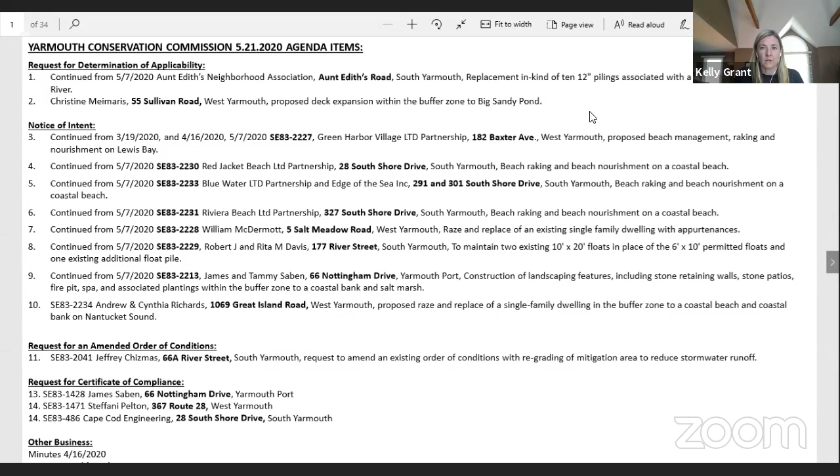Okay, so we are recording, so we will go with that, and then we can upload the video afterwards. Okay, so let me just check panelists. We've got everyone. Okay, so if we're all ready to get started, I'll start with the moderator script.

The May 21st, 2020 meeting of the Yarmouth Conservation Commission is about to be convened. As a precautionary measure to reduce the spread of coronavirus, all town buildings are closed to the public. Therefore, this meeting will be held by remote participation. My name is Kelly Grant, and I will be moderating participation for this meeting. I will now turn it over to the chair of the meeting.

My name is Ed Hoopes. I'm the chairman of the Yarmouth Conservation Commission. I will begin by taking a roll call for quorum.

David Bernstein. Here. Rick Bishop. Present. Tom Durkin. Here. Ed Hoopes is here. Paul Huggins. Here. Ellie Lawrence. Here. And Patricia Mulhern. Here.

With a quorum present, I will now call the meeting to order. I will now ask the moderator to explain how remote participation works. Okay, so pursuant to Governor Baker's March 12, 2020 order suspending certain provisions of the open meeting law...

All right, thank you. Our next order of business is a notice of intent. It's been continued from March 19th 2020, April 16th 2020, May 7th 2020. It's for SE 83-2227, Green Harbor Village LTD Partnership, 182 Baxter Avenue, West Yarmouth, proposed beach management, raking, and nourishment on Lewis Bay.

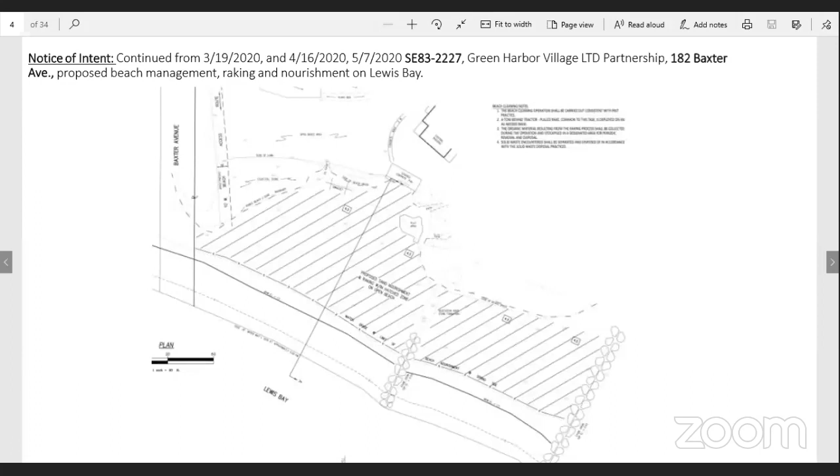Bob Perry, I think I saw you out there in the audience. Bob, you have to unmute. I'm unmuted. There you go. I'm on a speaker, will it be clear enough for you? Right now you're kind of just a little shaky. I'll let you know, if you see me waving my hand you'll know we can't hear you, okay? Bob? Is it better now? Yeah, that sounds a little better. Okay, I'm going to try again. How are we doing? Yep, good. Okay, let's hope for the best.

Just to be brief, we submitted some revised materials. For the record, Bob Perry, Cape Cod Engineering. I believe a representative of the Davenport companies is with us tonight, Jamie Vieira may be on the line. I am representing the Green Harbor Resort, and we filed a notice of intent for beach nourishment and beach maintenance in the form of raking and cleaning up. This work had been going on since decades ago. They had an expired order, so this application is to reconstitute that program.

We were before you a month ago. We submitted some revised information relating to a monitoring recommendation, as well as marked out on the site some of the dune boundary that was there. We didn't make a lot of changes because there really weren't that many changes to make. But the upshot is that the activity for nourishment would be followed by a monitoring activity that we outlined in our letter. I reviewed it with Kelly a few days ago, and we didn't have a lot of trouble there.

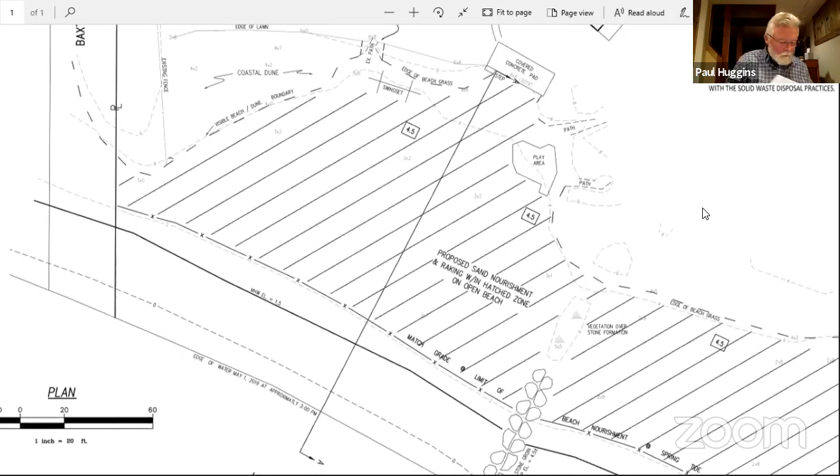Okay, Rick, I see you have your hand up. I just mentioned before the hearing started that I was recusing myself from this and the next two hearings. Okay, thank you, Rick. So let the record reflect that Rick Bishop has recused himself from this hearing.

Jamie Vieira from Davenport would like to speak. All right, hold on. So, commissioners, do you have any other questions right now? All right, so then we'll go back.

I do have one question on the access to this for the machinery. Does the plan show where the path is? I know it said it's going to change the path, but yes, we did. We changed that for you. It's now at a location where there was a pathway opening. It is now drawn to be 10 feet wide.

Ah, okay, yeah, right there in the center. It's just a sand pathway at this point. We don't think it would need any structural improvements, possibly a small border of landscape timber. But if we wanted to find ourselves with a more stable ramp, we would come back and talk with you about it, or bring it in and show Kelly.

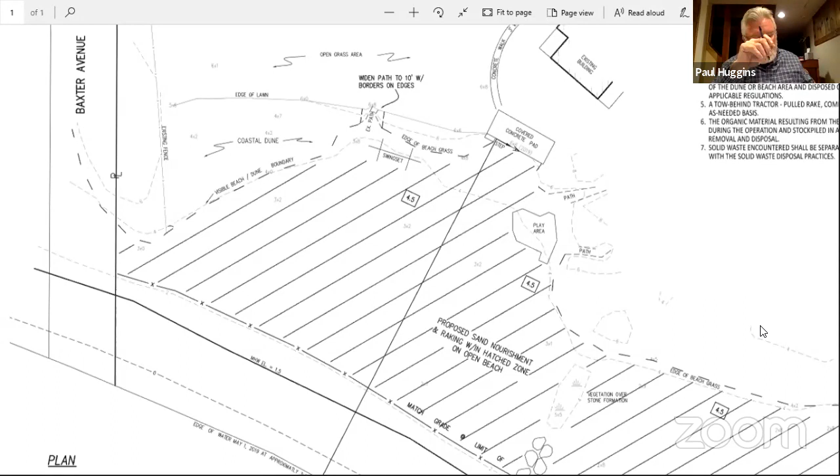Okay, so I don't see where you're talking about though, Bob. Are you talking about where it says widen path to 10 feet? Yes, that's amidst the little playground collection there. That's where we've got an opening already. I thought that was further over, wasn't it? Oh, that swing set. Okay, I see what you're talking about.

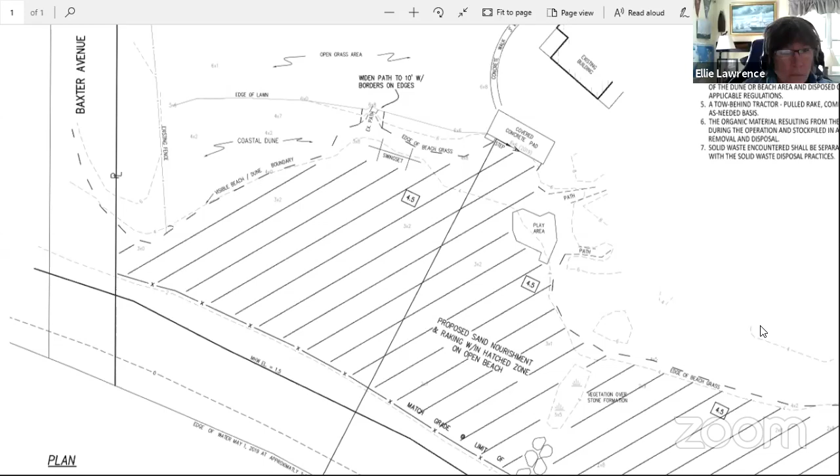Yeah, I'm going to let other commissioners... This is Pat Mulhern. Okay, Pat, go ahead. It's noted that there was no volume on the material specified for the nourishment, and that should be put on the plan.

Bob, I would have to double check. I thought we had put that in there. And there isn't a specific volume in the sense that, and I thought I calculated that at one point, and I'm so sorry that it may not be front and center.

I'm just going to clarify, it's Kelly here. 500 cubic yards is called out in the notice. It's just not called out on the plan. Right, we calculated that based on the profile.

If you've been there, you know how flat and uniform the beach is. That volume results from a calculation of that very thin triangle. I think it would probably be a maximum, but the nourishment monitoring goes a little bit into the general practice and the need for this. We have a very flat beach, and the need for nourishment is primarily driven by the prospect that the beach could become so low that moon tides would inundate it. And that's why the profile you've seen is a very slight change.

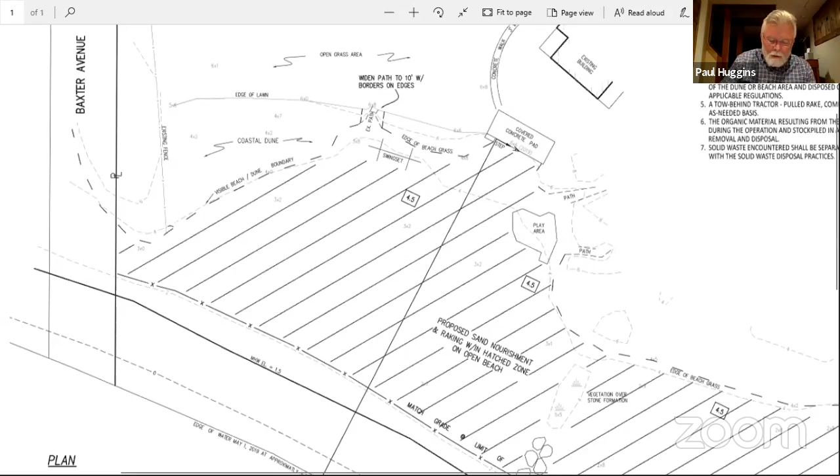And then there's a note that says the new plan includes a note that beach cleaning shall be carried out consistent with past practice, and there's a recommendation, I guess it is, that this should be removed, and the raking condition should be something else. There's a note to that effect. Is that to be discussed too?

Yeah, so my comment related to that is just that it's a very generic statement, and I think it would be helpful for it to be clarified with some specific points. So those have been included as a draft motion as well for conditions related to beach raking. Speaking with Bob previously, we'd include those conditions on the plan so that it's very clear for everyone involved what those conditions are. So those can be included in the motion as well, and we can review those in advance of the motion if you would like to.

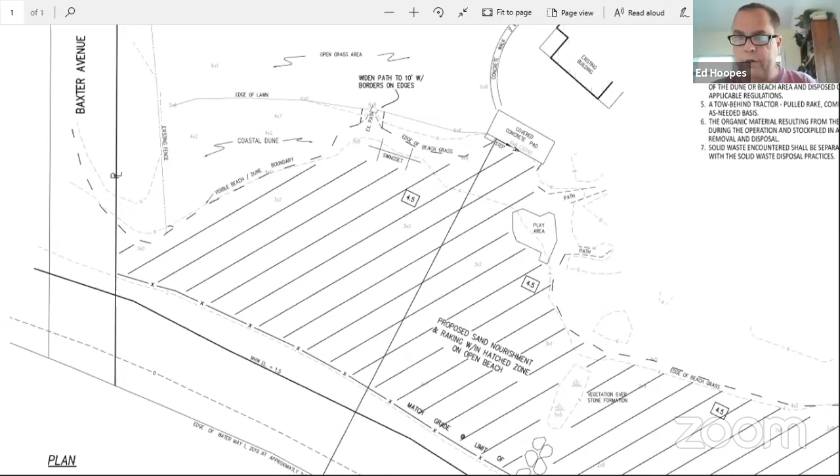Okay, I just wanted to make sure they weren't overlooked. Okay, thank you. All right, commissioners, any further discussion among the commission? All right, Kelly, any other comments? I have a general comment that I think will relate to all of these four projects, and that is...

There's evidence of some recent work on the beach on South Shore Drive, and I didn't get back out to Baxter Ave, so I don't know if the same work has occurred there. But that's obviously work that's been carried out before we've issued any permitting, which is concerning. There are also signs that the beach is being excavated, where sediment is being moved around with excavation equipment. I just wanted to clarify that that's not what is being approved by these permit applications - these applications are for nourishment and raking of debris only, not for removing sediment around on the beach.

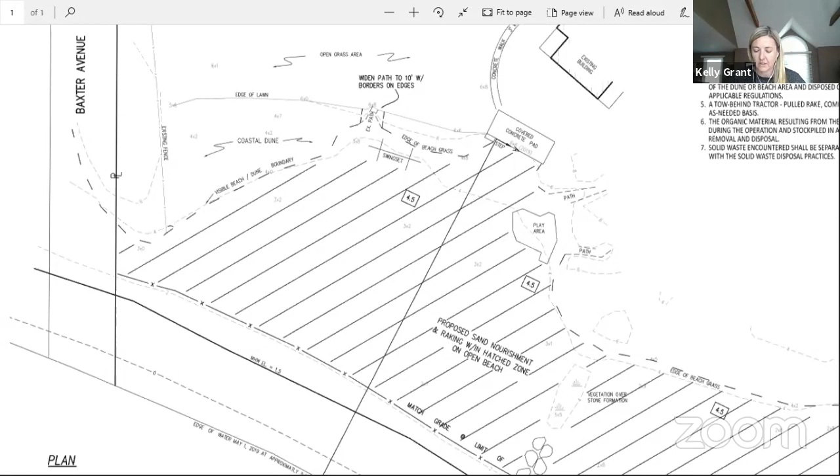So I wanted to make sure the commission were aware of that, and that the applicant was clear on what the expectation was in terms of the work that would be carried out in the future. It's a little concerning that work is being carried out now prior to the permits being issued. All right, so Bob, do you want to handle that, or does Jamie in the audience want to comment on that?

Bob Perry here. I haven't been aware of any activity because, of course, we're not there. I think Jamie Vieira, if he's here, can speak to it, or I will certainly convey what we've just discussed to them.

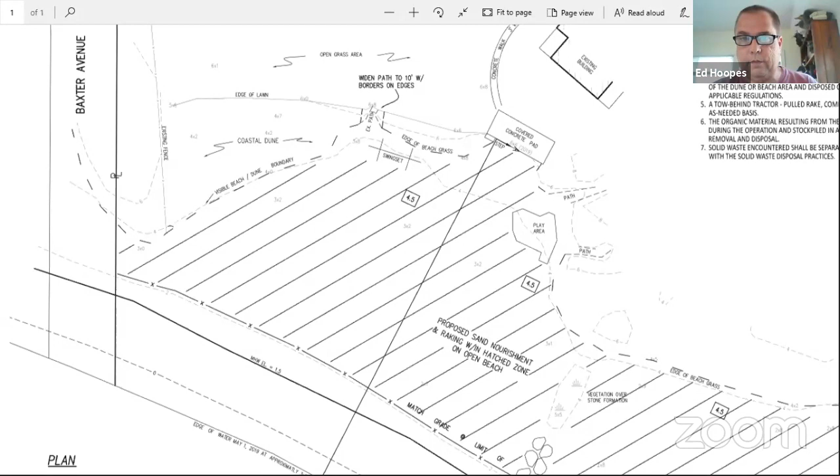Okay. Jamie, go ahead, make sure you unmute yourself. Okay, this is Jamie Vieira from Davenport.

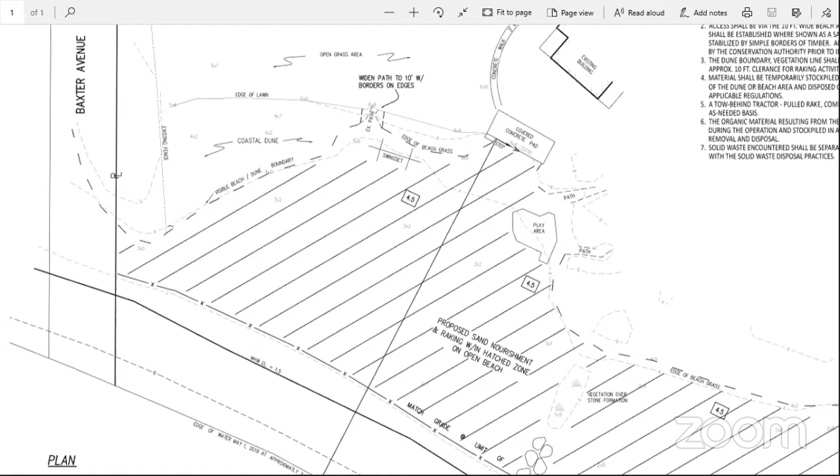I'm not aware of the full extent of what Kelly was referencing there, but I'm fully aware of what the scope of our approval would entail in terms of raking. I haven't seen the conditions, so obviously we'd like to hear them so we know what the parameters are.

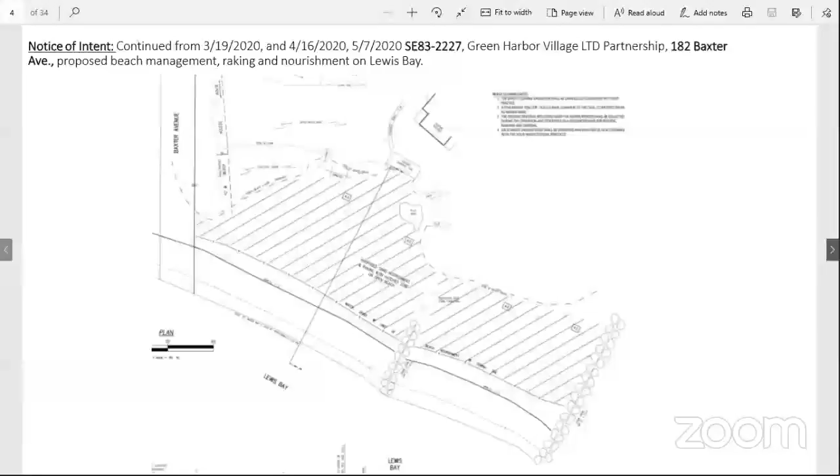One point I wanted to reference, and that is on the plan. You'll recall when we originally submitted, we asked for 10-foot access along the west side. We heard the commission loud and clear the last time, and we removed that. The point of access is presently now in the center, shown on the plan. It's about 6 feet wide, and we're looking to make it 10 feet wide.

We would remove the existing ramp that's there, and we would like the ability to bring in some sand to bring those elevations and make that grade sand versus a ramp. So there would be some addition of sand in that area so we can create that pitch for purposes of having a smaller piece of machinery than we envisioned going out on the beach, but we still need 10 feet.

For some of the commissioners' understanding, that piece of equipment goes out maybe once a week. Other times there's some daily cleanup, and that's by hand. Individuals may go out after the day's events with a small hand rake and clean up some areas, make sure anybody who left any trash picks it up, etc. The actual raking per se with machinery is now going to enter through that central area. We'd like it to be 10 feet wide, and we'd like to utilize sand versus that board ramp.

Okay, so what about the excavation that's been worked on already? I've got to find out what it is. It's not my department, Ed, apologize for that. There's a lot of things that are going on with the resorts as we wait to open, so I'm not 100% sure what that entails.

But as I said before, I know certainly what it is that we can do here under the parameters of this NOI or ultimately order of conditions. As it comes to maintenance, that would be the raking. As it comes to nourishment, we've got those parameters spelled out as well for purposes of what would be required for profiles, inspections, etc.

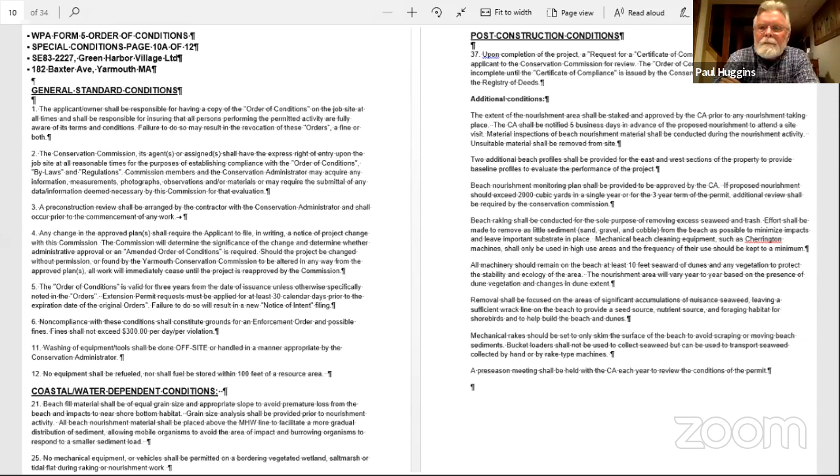Any other discussion? Is there anybody else in the audience who has any comments on this? This is your last chance for comment. I don't see any hands raised. All right, would there be any further discussion among the commission? If not, may I have somebody craft a motion?

Come on, folks, you just got to read it. I'll do it, new guy. All right, new guy.

I make a motion to issue an order of conditions approving project SE 83-2227 at 182 Baxter Ave, using the plan updated May 15, 2020, with the following standard conditions: 1 through 6, 11, 12, 21, 25 amended, 37, and the following special conditions.

The extent of the nourishment area shall be staked and approved by the CA. Prior to any nourishment taking place, the CA shall be notified 5 business days in advance of the proposed nourishment to attend a site visit. Material inspections of beach nourishment material shall be conducted during the nourishment activity. Unsuitable material shall be removed from the site. 2 additional beach profiles should be provided for the east and west sections of the property to provide baseline profiles to evaluate the performance of the project.

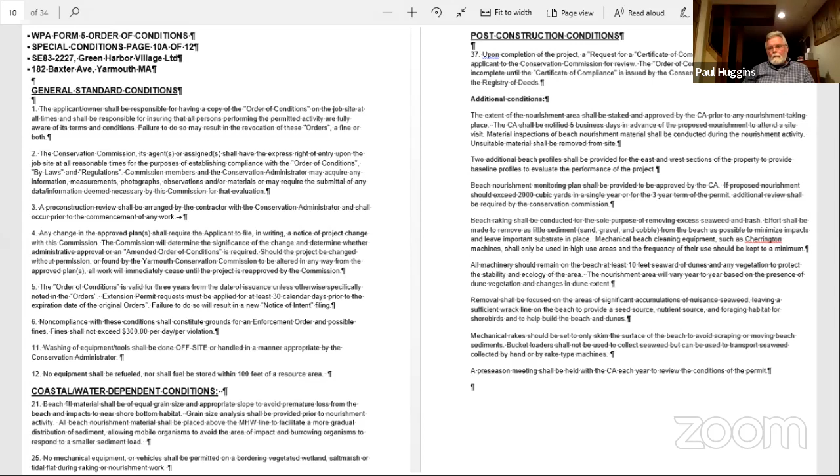Beach nourishment monitoring shall be carried out per Mr. Perry's May 11th document. If proposed nourishment should exceed 2000 cubic yards in a single year, or for the 3-year term of the permit, additional review shall be required by the Conservation Commission. Beach raking shall be conducted for the sole purpose of removing excess seaweed and trash. Effort shall be made to remove as little sediment, sand, gravel, and cobble from the beach as possible to minimize impacts and leave important substrate in place. Mechanical beach cleaning equipment such as a Cherrington machine shall only be used in high use areas, and the frequency of the use shall be kept to a minimum.

I think I got it all right. Or does that go on? It goes on, I'm sorry.

All machinery should remain on the beach at least 10 feet seaward of dunes and vegetation to protect the stability and ecology of the area. The nourishment area will vary year to year based on the presence of dune vegetation and changes in dune extent. Removal shall be focused on areas of significant accumulations of nuisance seaweed, leaving a sufficient wrack line on the beach to provide a seed source, nutrient source, and foraging habitat for shorebirds and to help build the beach and dunes.

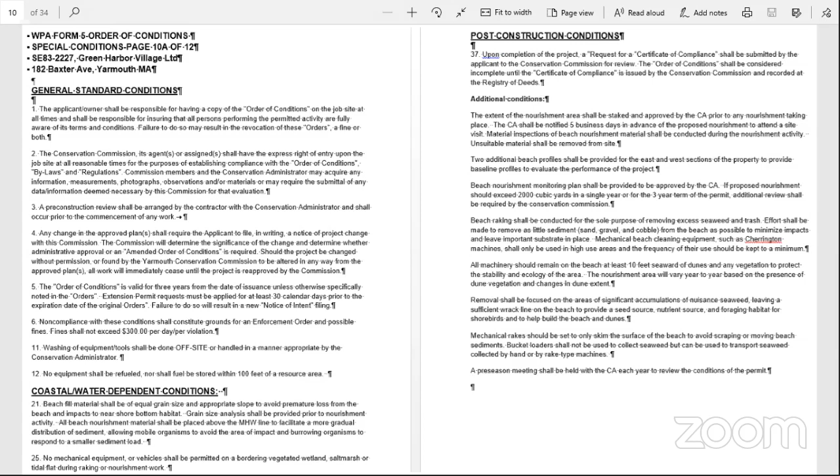Mechanical rakes shall be set to only skim the surface of the beach to avoid scraping or moving beach sediments. Bucket loaders shall not be used to collect seaweed, but can be used to transport seaweed collected by hand or by rake type machines. A pre-season meeting shall be held with the CA each year to review the conditions of the permit.

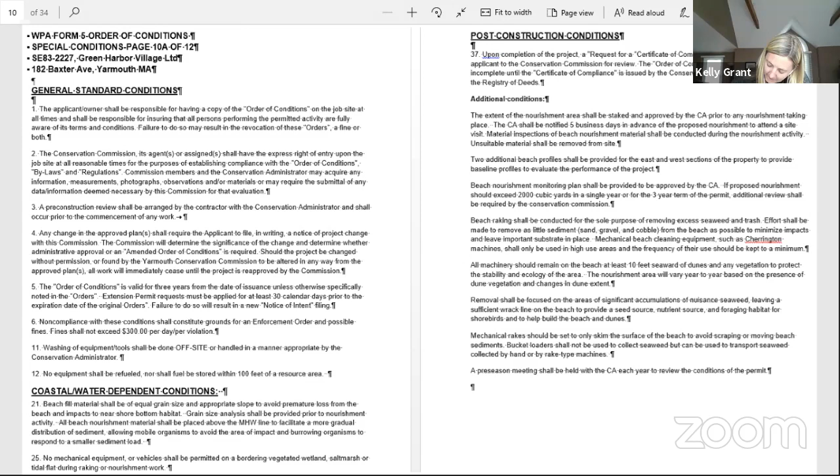All right, very good. Passed. It's been moved. Is there a second? Second, Pat Mulhern seconded. Kelly, would you call the roll, please? Sure. So Bishop recused. Durkin, aye with personal reservations. Bernstein, aye, with the hope that they don't do anything they're not supposed to do. Lawrence, aye with the same feelings as above. Hoopes, aye. Huggins, with reservations, aye. Mulhern, aye. So the motion carries 6-0 and 1 recused.

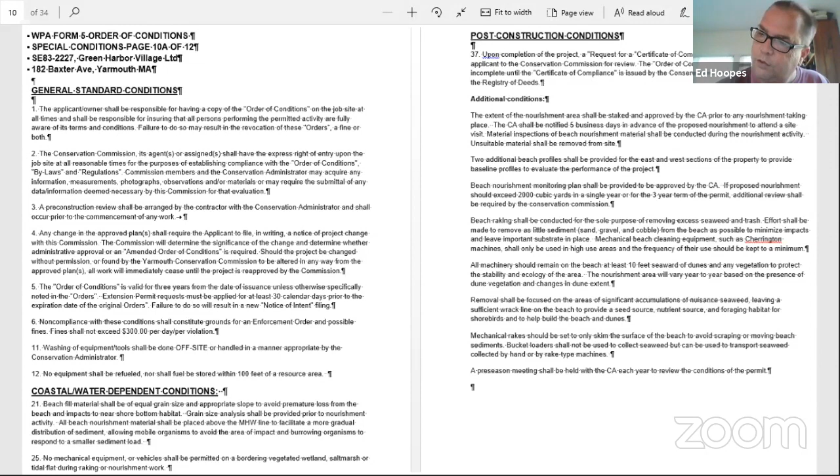Moving on to our next order of business is another notice of intent continued from May 7th, 2020 for SE83-2230, Red Jacket Beach Limited Partnership, 28 South Shore Drive, South Yarmouth, beach raking and beach nourishment on a coastal beach.

Bob, is that you? I'm still with you, and I have similar reservations that you all have, so I'm hopeful everyone will do the right thing. I think it's a lot of management, a lot of people to keep track of, but I think you're aware of it, and I think everybody will do a better job.

We filed this a number of months, weeks ago, I can't recall. However, we've moved it to this date. This again is a similar project to the one you just had. It doesn't have a terrific amount of natural area. The beach at Red Jacket is bounded with the upland by an abrupt seawall. There are some minor dune deposits that you can find that are vegetated, and the same rules, regulations, and practices that you just outlined in the last project would apply across the board here.

The same theories of beach nourishment, of a low beach versus a small beach, apply. Again, I would have to look through my notice to see the exact nourishment volume, but I don't have that at my fingertips. Here, I'm looking at my own notice, I should be able to pull it up. This one had 2,000 -- so this is the 2,000, and it relates to a pretty vast area. It's 99,600 square feet of beach, and it is in pretty good condition these days. But over the last several decades it has been nourished, and I think in the course of obtaining a permit to maintain the beach from a resort perspective, it only makes sense to include some level of nourishment that would be guided by the very same tenets.

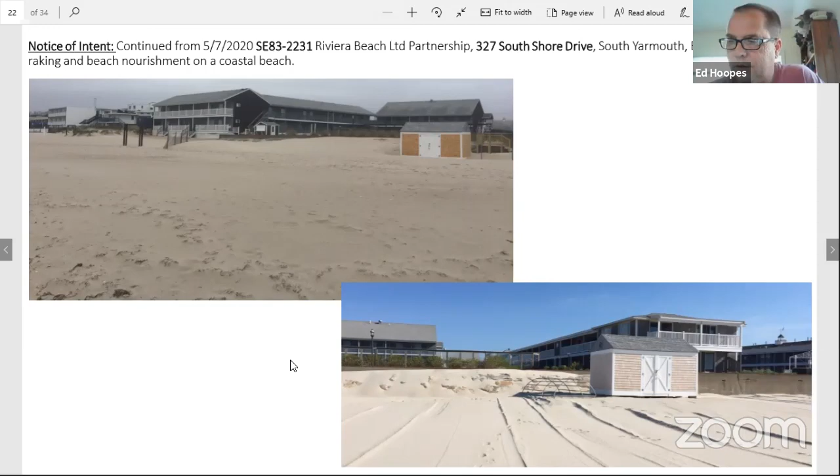Clearly they've been doing stuff over at the Red Jacket. I was there last week and a half ago, and I guess I saw that there clearly had been activity again. And the idea is that we don't have, we no longer have pictures that show before and after photos for the Red Jacket.

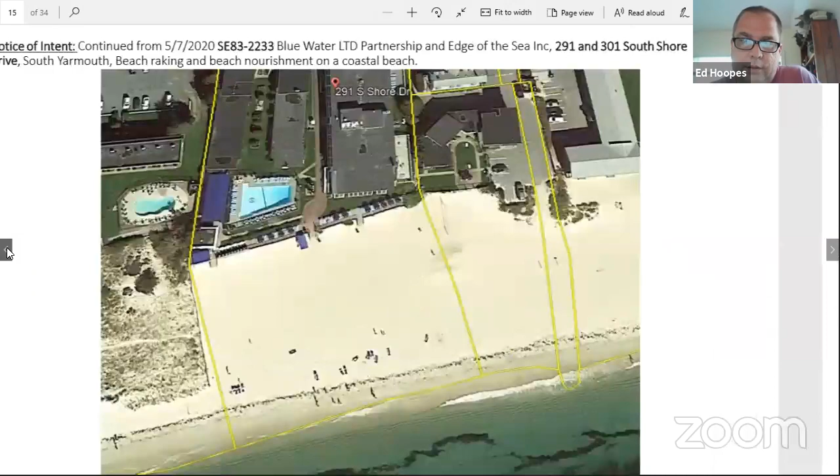Again, I'd like to move that one out of the way, unless there's other comments. Mr. Chairman, Bob Perry here. Yep, Bob, go ahead.

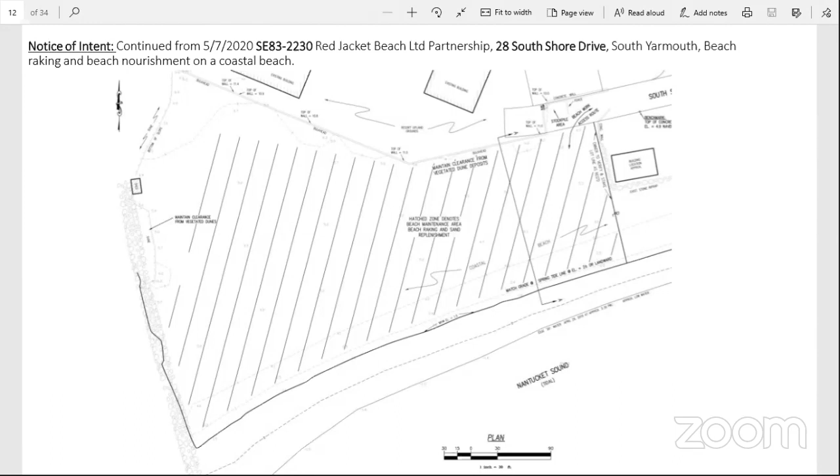I don't need to tell you how hard that makes my job, but I do want to tell you that the Natural Heritage and Endangered Species Program comments are pending. So you're not going to be closing this tonight. And whatever investigations or involvement you need to look into here, I just want you to know that we're certainly going to have to wait for NHESP.

That Kelly, I crossed that bridge the other day. All right, that's an important point. Thank you for reminding me, because plovers were seen trying to nest at 28 South Shore Drive, and with all of that heavy equipment on that beach, obviously there's probably being done some disturbance to that habitat.

I did see that Audubon had put some symbolic fencing up on that property. Right, so yeah, I haven't seen that. Correct, I'm aware that there was a fence installed. They do take note of this area. There are monitoring operations ongoing.

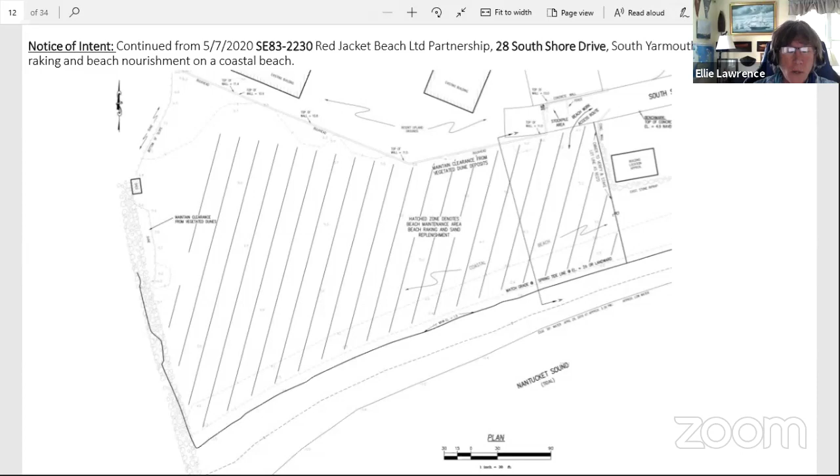Okay, so I think at this point then, does anybody have any comments about the nourishment end of it? Well, this is Ellie Lawrence, out there today, actually a couple of weeks ago. It looked like it had substantial accretion that had occurred over the winter due to the prevalent southwest storms.

We would, I hope, have a limit on how often they can do that, and whether, if the beaches are right, why even bother doing it? I would agree. Ellie, Bob Perry here. The monitoring program sort of points in that direction.

You will find that the management probably wouldn't want to spend the resources if the beach was in good shape. And the nourishment is being prepared for the contingency-level problem. So I don't think there's going to be just a bunch of sand dumped out there for no reason. The management would bring their concerns to our attention. We would look at it. We would bring that to your attention.

And I think that nourishment, it's activity that you would be notified for. And I don't know if you would have a way to put the brakes on it if it wasn't needed, but you could certainly try to build something in like that.

Well, from what the discussion has been going on, the activity has been going on without discussing it with us. So yeah, I have a concern. I for one don't agree with activity going on without authorization. That's not the world I live in, and I don't know that there's any nourishment going on. I think there's, from the looks of it, the ongoing annual get-the-resort-open type activity, which unfortunately appears to have put some sort of a machine on the beach. But that's for you guys to, I think, speak with the organization about.

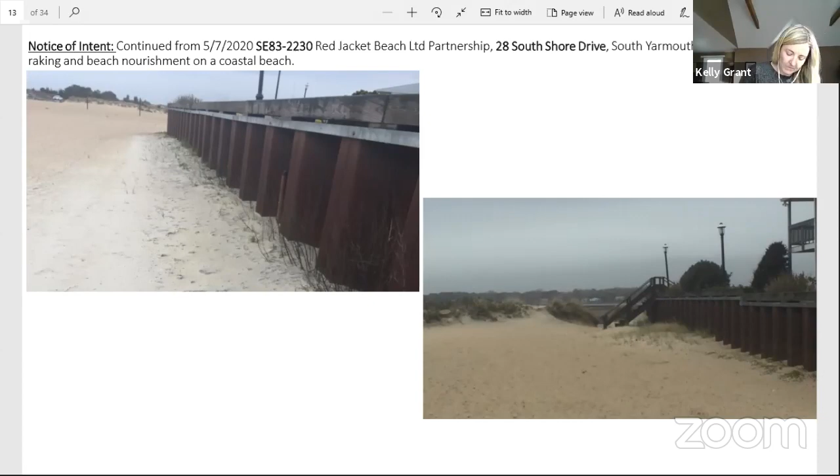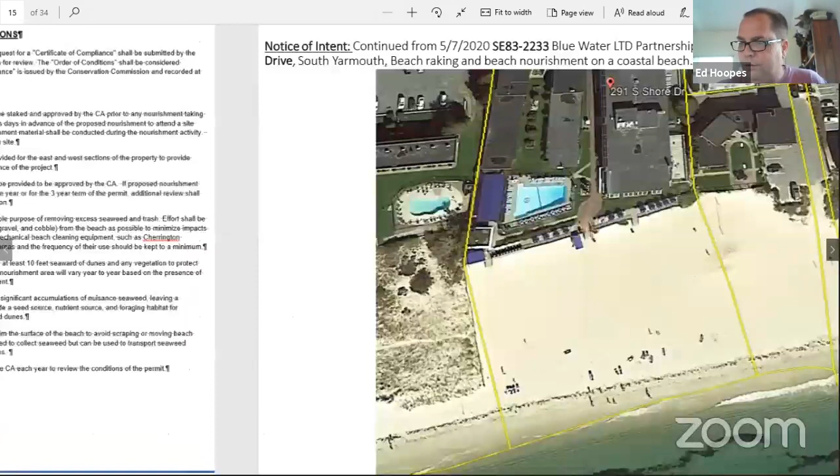Bob, we've heard it all, but if you... Yes, you have, and I won't put you through it again. This project, although similar, did have a dune restoration component to it.

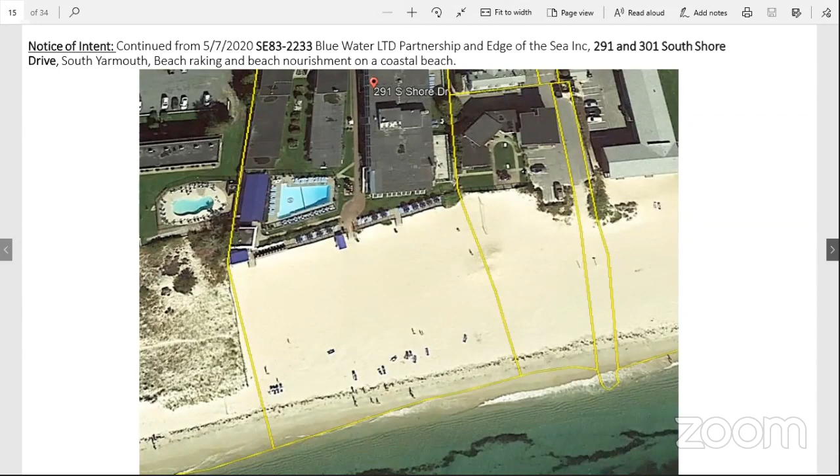We've included that in the notice, but to place the dune deposit where it may be more effective, where it may have a natural tendency to grow, and would provide the same volume of sediment for storm damage prevention and flood control against the bulkhead that's there, and also a source of nourishment for the beach. That hummock of a dune was a combination of natural forces and possibly activity, we don't know, but we've quantified the area and proposed a commensurate equal area to be formed and managed and protected, as you see on this plan.

That's the only difference. I would need to go again and refer to my nourishment volume. I think I'm at 291 here. I've got a bunch of notices open on my computer. Let's see, 321. There we are. This one didn't include cubic yards of nourishment.

It did not, no. Okay, let me just check what we might put. Okay, we put 180 cubic yards in for the dune. And I can see you are correct. We had 31,500 square feet of beach, far less, about a third. So you're probably into the 700 cubic yard range here, maximum.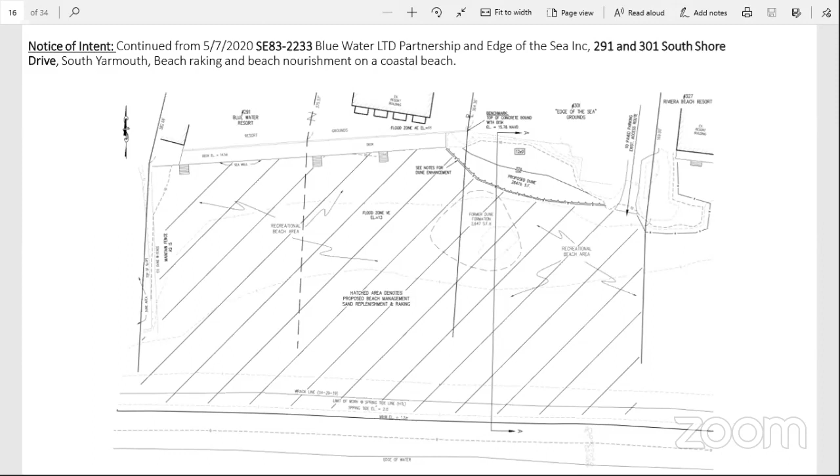All right, thank you. Next order of business is another continued notice of intent from May 7th, 2020 for SE 83-2231, Riviera Beach Limited Partnership, 327 South Shore Drive, South Yarmouth, beach raking and beach nourishment on a coastal beach.

Open it up for your discussion at this point. Thank you. All right, commissioners.

Ellie Lawrence here. Again, I don't think we got the Natural Heritage report on this, so I make a motion that we continue this until the June 4th meeting. Second, Tom. Okay, Kelly, would you call the roll please? So Ellie made the motion and Tom seconded it. Rick recused. Durkin, aye. Bernstein, aye. Lawrence, aye. Hoopes, aye. Huggins, aye. Mulhern, aye. Motion carries 6-0 with one recused.

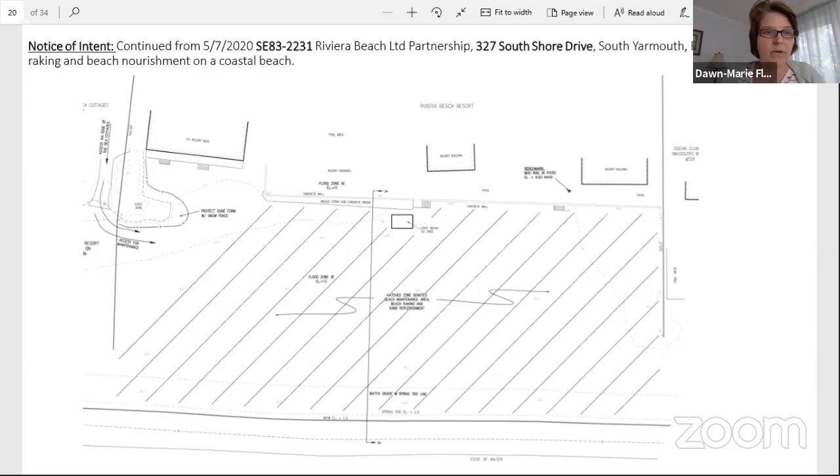We did have another hand raised in the audience. Dawn Marie, do you know? It's... 508-394-1373. I don't know if that was maybe related to one of the previous ones, or should we just unmute them and see? Let's find out who it is. I think it's... Hello, this is Phil Cheney here. I knew it was Phil. There you go, okay.

Right, all right Phil, so we've called your hearing. I think everything has been done according to what we had asked last meeting with the expansion of the mitigation area. Is that right? That is correct. We managed to get it up to a good 2-to-1 overall, including some additional shrubs, and just absorbing all the area with the meadow and native plantings.

All right, commissioners, do you have any questions from the commission? Oh, so it would help if I'm actually looking at the commissioner panelists here. All right, any discussion amongst the commission? Kelly, you good? You good?

Yeah, the only issue I have with this project is that remaining certificate of compliance. I think we have it on the agenda, but we hadn't received the engineer or surveyor's statement in terms of whether the work was completed per the approved plan. So the best I could do in the absence of that, which I understand Dan Ojala is working on currently, is I did a comparison with the current conditions plan and called out, I think there were some things that were being addressed by this plan, such as the downspouts to dry wells. The house footprint looks to be roughly per the approved plan.

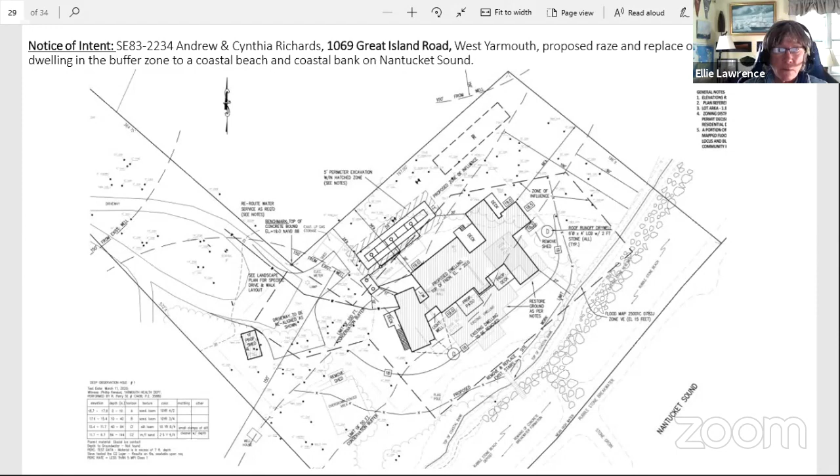Well, I have to admit, I was not out at the site. I don't know who else had an opportunity to go out there. I would be okay with Kelly, if she's good with that, giving her input and her decision on that. Okay, no, I mean, it is pretty thick there along the shore, so.

Can I just clarify, because the vegetation along the top of the bank is fairly sparse, and I just wanted to check what density of plantings was actually being proposed. I think I missed that at the beginning. So you're offering 3-to-1 mitigation—what did that actually translate to in terms of square footage?

200 to 210 square feet. I went over this with Mary just today, in fact, and it would be beach plum. It possibly could be bayberry, but there's a very thick coastal plant community all through here, and there are invasives.

And although it's not on the table tonight, the Richards spoke with me about the possibility that they may seek from you to look into some of that, but it would be off to the sides. But our mitigation, if you look at this plan, would be where the work limit says work limit, right near the coastal bank, just on the water side of that work limit.

That area would be sort of hem-stitching the work limit—we would find a 200 square foot strip that would enhance, probably double the width of the vegetation that's currently on the coastal bank, for a distance of possibly 50 feet or so. That's what we spoke of, because we felt that was where the mitigation would have the best relationship to the encroachment. That's where the thickness of the vegetation to the bank—you can see we've located it here—is the most narrow.

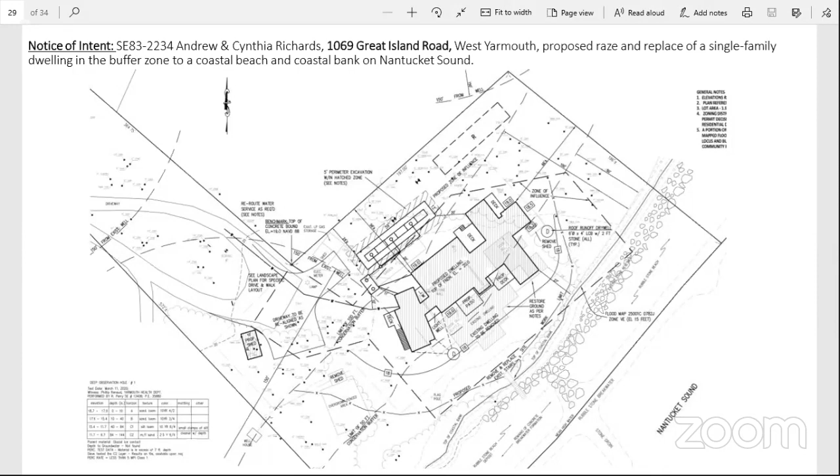I'd say in the buffer, everything is staying that's a tree. There's a 14-inch pine actually that's in the buffer, but it's quite close. I can't say, but that may even be something they'll try to save because it's not to the northeast of the house. But you can see trees that are outside the buffer in that new driveway segment.

There's a few things there that have to go. But when you look at the buffer zone off to where that overgrown fenced area is there on the southwest, there's no proposal to do anything there. The work limit might go through there, but they might clean the area up a little, but there are no trees that I can see of any significance that are in the buffer that I could say would need to be removed. I'm expanding my view here.

I don't want to tell you something that's not quite right. There's a 5-inch oak that I see that I don't see coming out. On the northeast, there's a twin oak. When we get over by the deck, we're about 70 feet back. There's a triple oak, I bet that's going to have to go, but the 10-inch oak, no. An 18-inch pine that's right there at the edge of the buffer, yeah, I think that's gone. But we're probably talking less than half a dozen trees that would be altered in the buffer, in the 100-foot buffer, if that.

And then just my other comment, the mitigation is great. I would love to see us reestablishing more of the 35-foot no disturb zone, but I understand that's a big ask. So we're probably going to end up at, I would say, about maybe 15 feet of buffer along that narrower strip, which is better than what's there. Obviously it would be great to have a bit more because there is a considerable area beyond that, which is just going to be grasses. Albeit, I understand it's not going to be your typical lawn grasses, so I appreciate that.

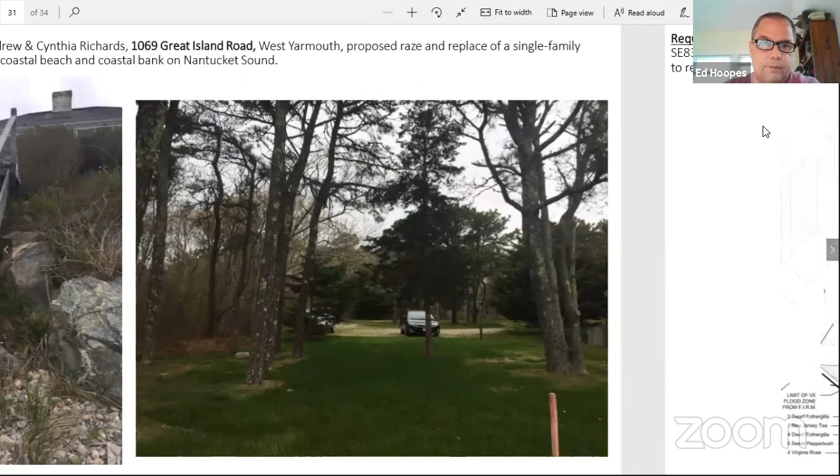Well, are we going to continue this pending the 35-foot line and the mitigation plan? My only comment on that is that I thought that this would be continued for the mitigation plan, so I did not prepare your draft conditions. Right, so if you want to go ahead and make a motion, we will just cobble together the conditions based on the last project. But I understand there's not a huge rush on this project. If you are able to wait and take a look at that mitigation plan, then that is perhaps my preference.

Let's just wait until, we'll continue it if that's all right, to June 4th, and that'll be more than enough time to get everything put together and add it to the plan. That's fine, I don't object to that. If I'd had more of my marbles collected, I might have gotten that to you, but I wanted to speak with you about it first.

In the northeast quadrant of the development area, spilling out a little bit into what was an area of old rugosa roses, there's a bit of a swale depression that goes a little bit off the property. Mr. Wilkinson and Jeff Chizmas had pondered what to do there. I think they're planting the area anyway, and there was a propensity for concentrated runoff to go through that swale. Their thinking is that by regrading it a little bit and planting it, they will distribute the runoff in not such a concentrated way.

Yes, and it probably has to do with some appearances, and the neighbors are on board with it, I'm told. I just agreed to take a look at it, try to understand it, and file the amendment for them. When I was first introduced to the idea, I said, well, you're going to put all that planting in there, you're going to be digging the area up anyway, and that's going to count for quite a bit of the activity. So their sense is to take the curse out of the land while they're doing this, and that's the essence of this proposal. With Wilkinson minding the store on this type of coastal planting effort, you're in good hands. That's the summary here. Not to prolong it, happy to answer your questions.

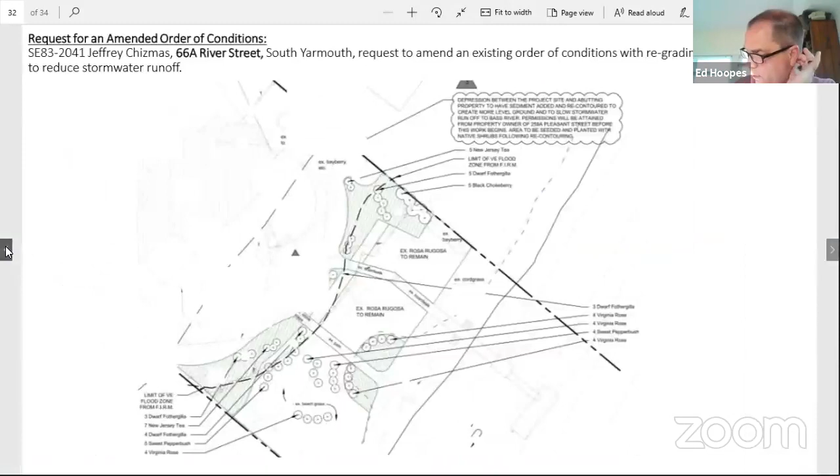Okay, thank you, Bob. Kelly or Bob, there is a note on the plan with the neighbor to the northeast that they're fine with the work going on. There could be some changes to grading or causing water to run onto that property. Do we have a letter from the homeowner stating they're all right with this? Actually, the water runs onto Chizmas from the neighbor. Oh, okay, it will continue to do that, it just won't be as steep.

All right, so do we have a letter from the abutter for the overspill for the plantings, that sort of thing? Kelly, I don't know the answer to that. No, we do not have a letter from the neighbor. Mr. Chizmas would like to make a comment.

All right, if you would hold on for just a moment. Is there any further conversation among the commission first? Yes, this is Ellie here. From the plan, it looks like the low areas where all those bushes are - if they fill that in, they have to obviously remove the bushes. The other question is how much fill is going to go in there?

Bob? Well, I could only eyeball it. It's not something I investigated, but I would speculate they're looking at 5 to 10 at most of compactable topsoil quality material to have the best agricultural function for growing what they're going to plant. There's no interest in putting sand in there. It's too shallow a fill - it doesn't amount to more than 1.5 feet of grade change. So they'll do it, I believe, all with good quality topsoil.

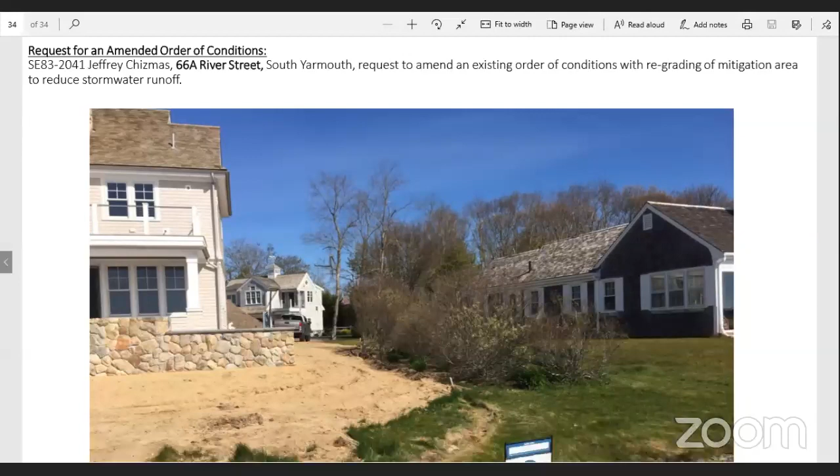The reason is because we want to make sure that the plantings make sense. Some of the plantings in there are dead right now. We've had a lot of fierce winter weather here, and some of them have not survived. Some of them are barely alive, and some of them are alive. The idea is that if we replant this and cover up the root systems of these plants, some of them may not survive, particularly if they're already half dead. And of course, the ones that are already dead need to be removed.

As you know, we've had some fierce storms, 70, 80, 90 mile-an-hour winds in the winter, and the plantings have not survived well, frankly. So part of the thinking is to try to replant with native species that are more hardy, more resilient to some of the fierce winter weather.

By the way, I'm looking at something in my file here, and I wasn't prepared to speak to this, but I don't know that those plants were confined within the work limit of the original project. They are right on the boundary. It's possible the original project did not include those in the work limit, but I thought that they had. It's just that they've been preserved up to this point.

If you see the amount of work going on there, I think they might deserve an examination, as Jeff says—they could use some enhancement if they've been harmed or set back. Frankly, most, if not all, of them are out of the work limit. Oh, they were. Okay, yes, so they were not included earlier.

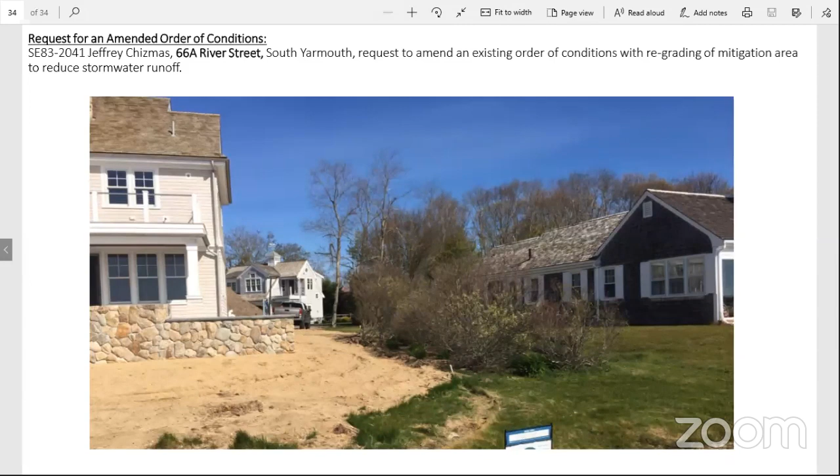All right, anything else with that one? Nothing further with that one. I do have a couple of updates, if you want to go to those now, or I think Tom had something he wanted to discuss. Okay, Tom, yeah, we'll go to Tom first.

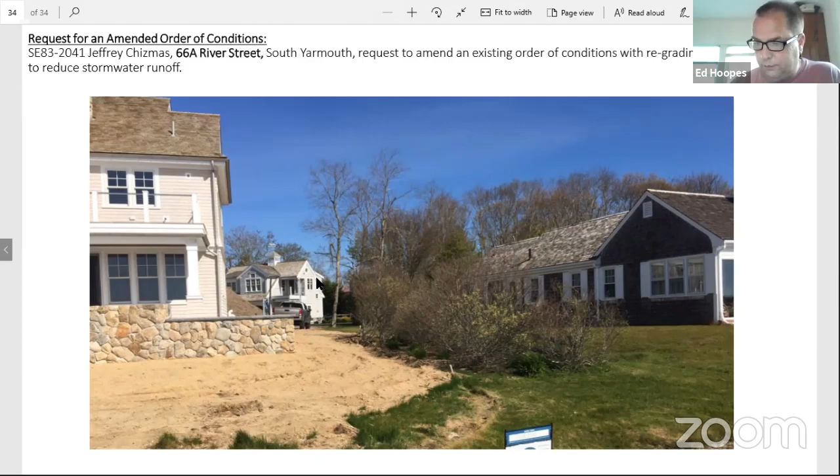Okay, appreciate that. There have been a number of suggested webinars and seminars, etc., that have been proposed by the Association of Conservation Commissions. I wanted to know if any of you had familiarization with any of these, and do you have any strong suggestions for individual participation in them? And if you do, Kelly, how do we put the payment requirements on you?

That is a very interesting question because it relates to my staff updates. Okay, so let me share with you... there's a chat, oh okay. Let me share with you a slide.